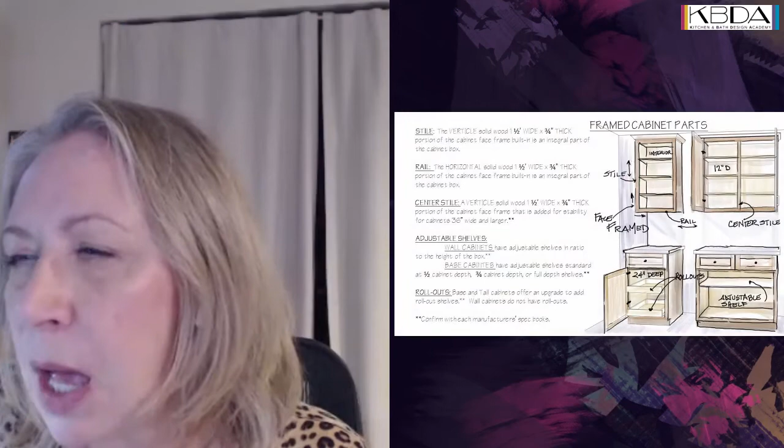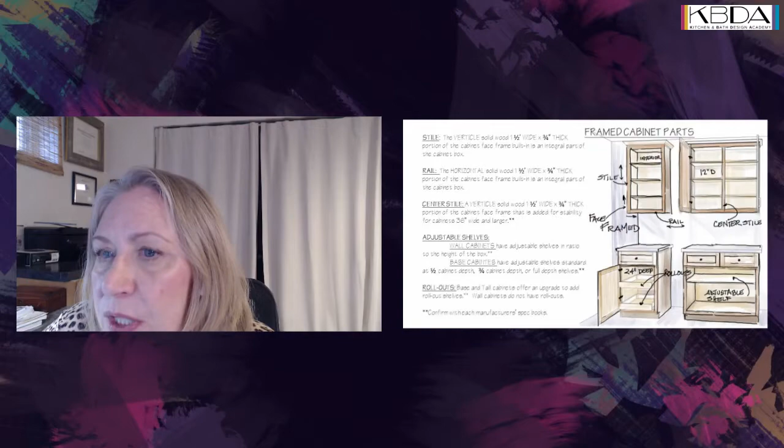Let's show this in the stream. I'm going to minimize me. Oh, I'm on the wrong side of town, okay let's do that again. Well this just doesn't, how do I do it? Take my head out. Okay, so what's on the top here is similar to what's shown in the rollouts on the bottom. So I'm going to make this bigger so you can see what I'm talking about.

So a framed cabinet actually has the solid wood frame around it. Like you open up the door and it's not 3/4 of an inch, it's 1.5 inches approximately. Generally everybody's a little bit different, but a face frame cabinet is usually 1.5 inch solid wood, stiles which go up and down, and rails which go side to side. And your interior construction, side construction, all that stuff is different. And then you have center stiles, whatever.

The main thing is, if you have an 18-inch cabinet, the opening in a framed cabinet is going to be less, because the 18 inches is an outside measurement, right? So we know that 18 is an outside measurement, it's an 18-inch cabinet.

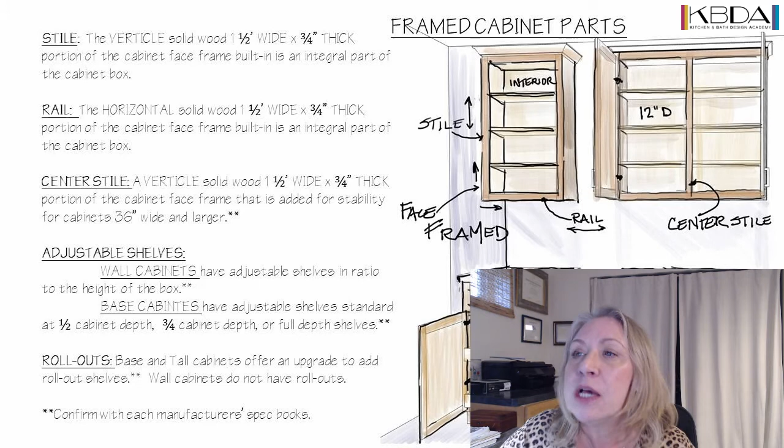The interior opening, meaning clear from this corner to this corner, is 18 minus - we're taking away 1.5 inch for my stile, minus my other stile which is 1.5 - equals my clear opening. On that 18-inch cabinet, it's 15 inches from opening to opening. You could say it's 18 inches minus 3 inches, because 1.5 and 1.5 equals 3. However you come up with it, you've got to minus everything, and that's your opening. So my 18-inch cabinet can only fit something in there, clear through the frame, with 15 inches. Okay, so that's the premise on framed cabinets.

Now, how do I get it to go in the stream too?

Now, with the frameless cabinet, here is the frameless cabinet. There is no frame around the face of the cabinet. It's strictly sides, top, and bottom, which is standard, typically 3/4 of an inch, medium density fiberboard, particle board, furniture board, whatever you want to call it. Usually in America, or whatever the millimeters are, it's 3/4 of an inch.

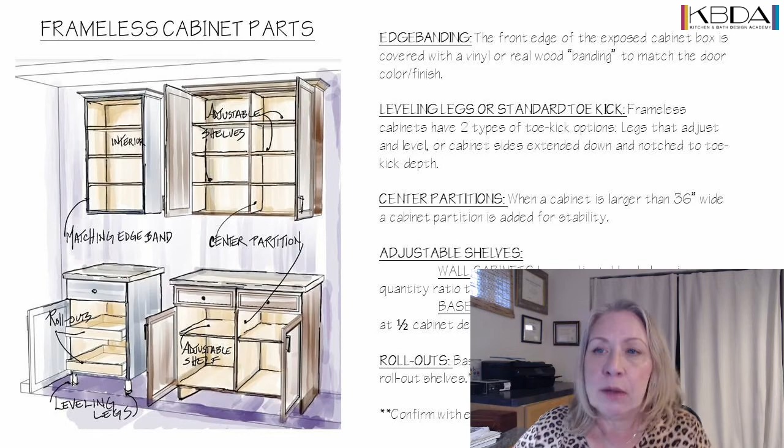So if I have an 18-inch cabinet, it's going to be a different mathematical opening. It's 18 inches minus one side 0.75, minus the other side 0.75, equals 16 and a half inches opening. So I have an inch and a half wider, right? 16 and a half minus 15, I have an inch and a half more opening. So take that into account.

So I'm going to hide that. This was the question. The question was, will my microwave fit in a 24-inch base cabinet? She already ordered the cabinet. It's on order. It's a 24-inch cabinet. So my question right away is, is it framed or is it frameless? Because that's going to determine the opening of the cabinet.

So she writes back and says it's a frameless cabinet. So in that, she shows the specs. Now I got to put my glasses on, and I don't know that anyone can see this. Should have cropped it all. Shoulda, coulda, woulda. Life goes on. You make it, you don't.

It's math anyway, I'm going to read it to you. So I'm looking at this Wolf microwave drawer, and it's a 24-inch drawer microwave oven. It shows me, on this face frame cabinet, the whole opening.

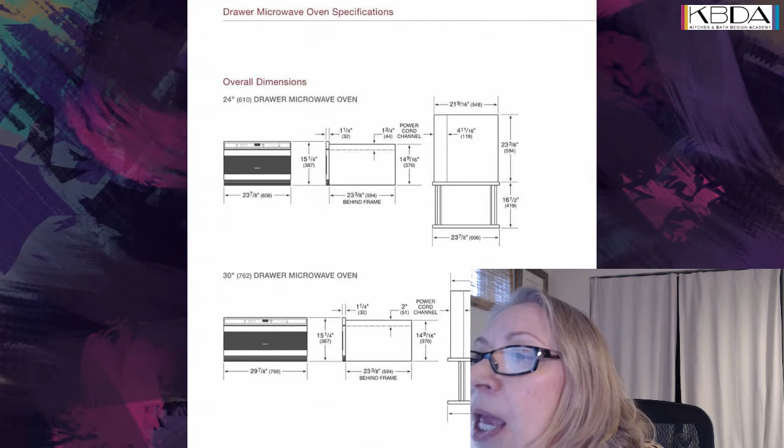This is really what you want to know, the width. So from door edge to door edge, the outside measurement is 23 7/8. Now, a cabinet that is 24 inches is 24 inches. So I have a 24-inch cabinet, and the overall appliance itself is going to have 1/8 inch clearance, which breaks down to a 16th and a 16th of an inch on each side.

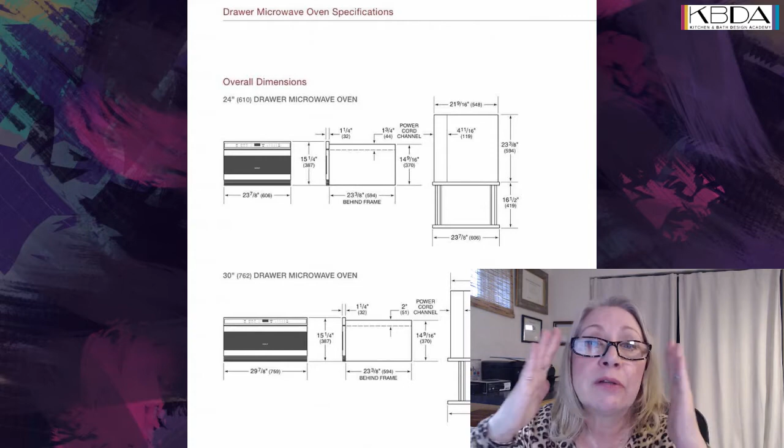So that's really going to be tight right to the edge of the appliance. It's going to go very close to the adjacent door. There's nothing wrong with that, just letting you know. Do the math. So we've got, but when I look back here, the opening in the back is only

21 and 9/16. So therefore, I have a frameless cabinet that's 24 inches. 24 inches minus my frameless, now, 0.75 minus 0.75 equals 22.5 inches. So my clear opening to get an appliance in from front to back is 22.5 inches.

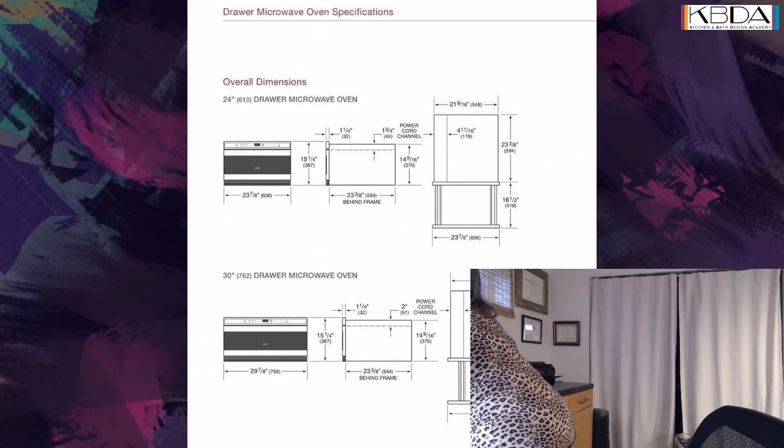And this appliance is 21 and 9/16, so I'm going to take 22.5, which is what's open, and minus 21.5625, equals 0.9375, which when I go to my handy chart... 0.9375 is, where is it... 0.9375, 30 thirty-seconds. Okay, so I've got 30 thirty-seconds left over. So I can get this microwave to fit inside a frameless cabinet.

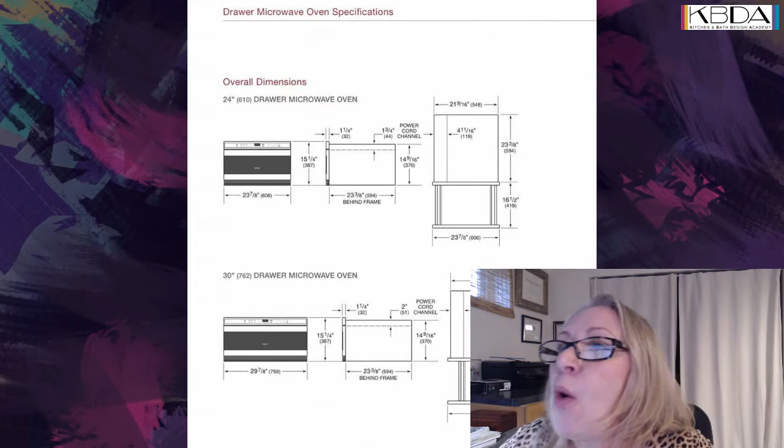However, when you look at the depth, and always a 24 inches deep cabinet, again remember that's outside to outside. So your 24-inch cabinet, depending on the construction of that, you have to allow for the back to be routed in, or dadoed in, or stapled on, or whatever, because the cabinet does not exceed 24 inches, and if it's millimeters, it doesn't go past. Everybody, that's a standard. The doors vary in thickness, but the box itself is 24 inches.

So I have 24 inches front to back, but I have a 3/4 inch back panel on my appliance. So I got to at least, on my cabinet, minus 24, I got to allow for that 3/4 inch. So I have clear, 24 minus 0.75 gives me 23.25 from front to back.

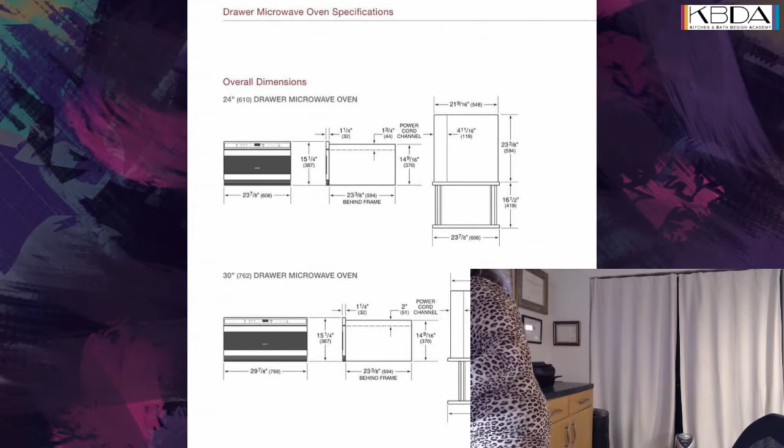So this is 24. I should just take this off the wall for a second. Feet up and down and up and down. See, I've used this for years and years because I don't always remember what they are. My trusty chart, sorry for my butt.

So see my chart? It's my calculating chart. You can download that for free. I love my little chart. Some people have it on their desk. Colin made it from the 2020 Power Users Group, made a nice little mouse pad with this.

So I have 23.25 left over. So I have 20 minus, did I do the minus? 21. No, oh shoot, clear.

24 minus 0.75 equals, just so I don't make a mistake, minus 23 point, and it's point, so 3/8 is .375.

I'm going to be short by 0.125, like a fraction of an inch, 1/8 of an inch. So more than likely, because it won't sit flush for that 1/8 of an inch, and you really want your appliance to get flush.

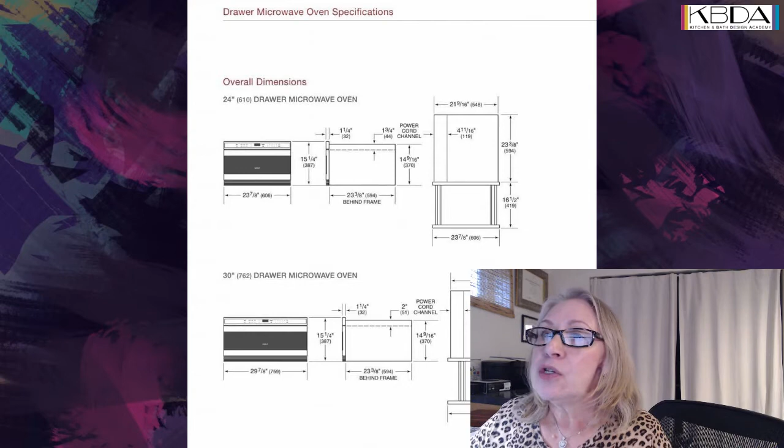However, the door is - look at me - the door is 1.25 inches thick. So the box is 24, and I'm going to have this front metal panel, adding up to 1.25, adding to it, it's going to leave me at a depth of 25 1/4 inches overall from front, with the cabinet plus the appliance door.

So the depth is 25 1/4. Typically, cabinets are 24 inches deep, and the door - now the box itself, so there's a box measurement and then there's a door on the cabinet measurement. Same way that there's a box measurement on this appliance and there's a door thickness on this. So a kitchen door is typically 3/4 of an inch thick.

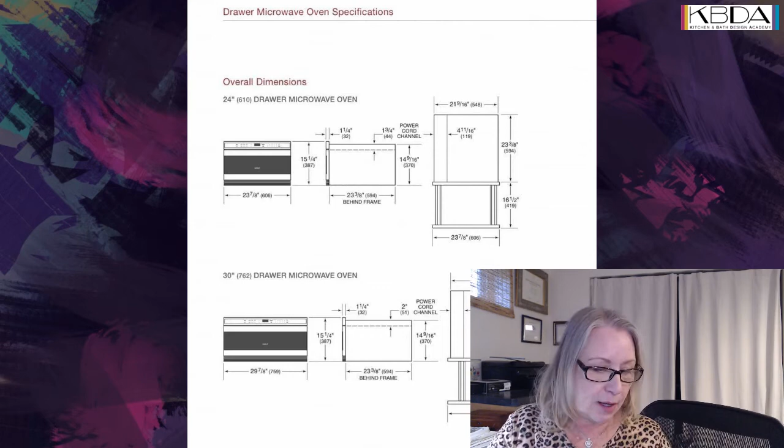So I'm going to have a 24 3/4 door. So 24 3/4, I've got 25 1/4 overall to the front of this cabinet, and my cabinet that adjoins right next to it is only 24.75 deep. It's going to stick out a little, like a 1/2 inch past a 3/4 door. If you get a 1-inch door, it'll stick out less, and a 5/4 door, it'll be flush.

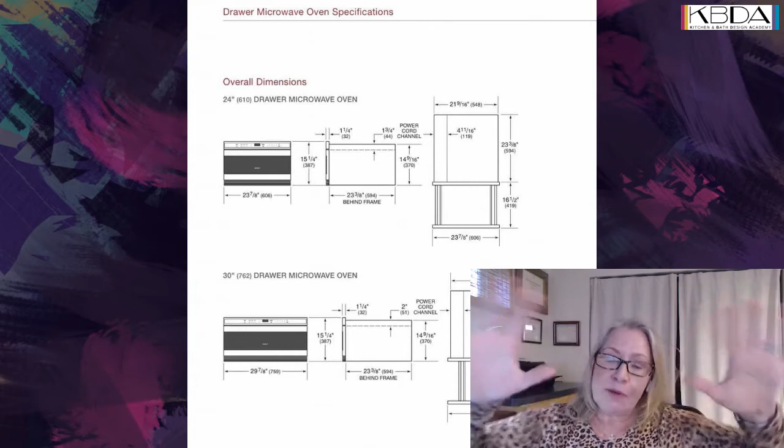So you got to know the thickness of your door, because some people want that really, really flush inset, and you have to kind of build your cabinetry around accordingly. So you have to see what is the look that you're going for. But you need to add all those things up so that when the appliance goes in, you don't go, oh, ugh. Because you might have a client that will freak the frig out because she's thinking it's going to be flush because nobody told her it wasn't going to be flush.

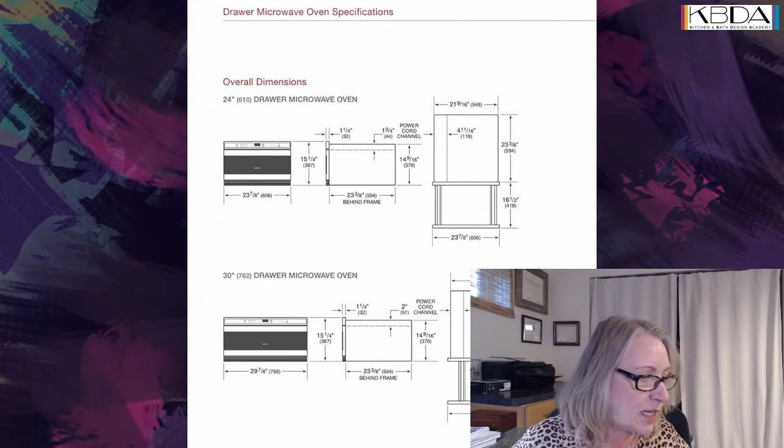You see? So when people are doing their kitchens, they're all freaking freaked out. I'd say, what do they need? They need a Xanax and a glass of wine, maybe the whole bottle. Hi, bye, hon, I'll see you later.

When you do a kitchen, it's really, really, really just very emotional. So you got to look at these specs. So this particular cabinet that's 24 inches wide, frameless, will accommodate this microwave drawer oven. However, they might need to cut a hole in the back of the cabinet to get it to stick more flush, get it in that 1/8 of an inch.

Or you tell the factory, don't put the back on. It's very common not to put the back in an appliance like this, to cut holes in the back of the cabinet. It's really not a big deal. It doesn't really affect the integrity of the cabinet, unless you're ripping the whole entire cabinet apart.

So anyway, then the door, you got to let them know the thickness of the door. So in her kitchen design with a 24-inch base, frameless, she can accommodate this microwave oven as long as she has now the proper height. So you do the same thing with the inside, the height of your opening.

So you're going to know that the door itself in this particular situation is 15 1/4 inches overall to the door. If you look really hard, you could see it. The door is flush on the bottom and protrudes up for a little bit. So it protrudes up.

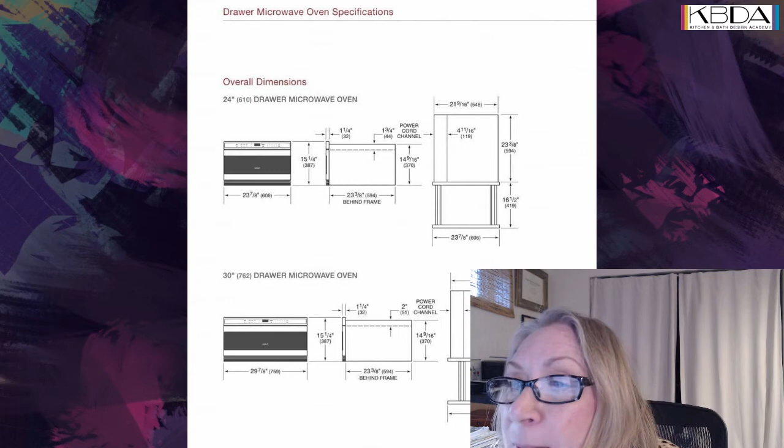Where am I? That is 11/16 of an inch, or 17.4625 millimeters. So that reveal at the top here is 11/16ths of an inch.

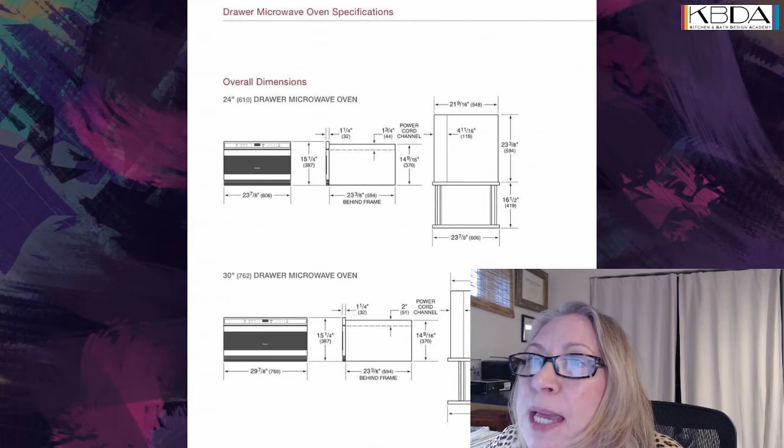So I got to make sure that I accommodate, and to me, I'm going to go up always a little bit, which is going to give me on my chart, one up is 3/4. You have to make sure that you've got 3/4 inch clear of space so that this cabinet door, whether you put it in the second, a little drawer above, or it's at the top, you got to make sure you accommodate this 3/4 of an inch at the top. And on a framed cabinet, a frameless cabinet, that's going to be right at the top.

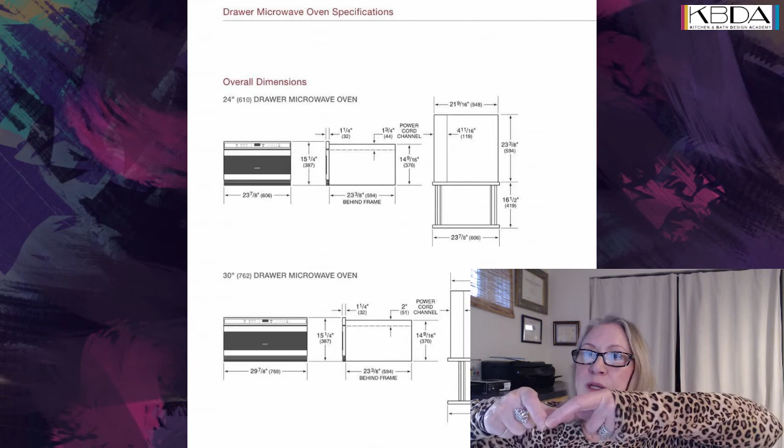Yeah, 3/4. That would come right to the very, because the 3/4 of an inch would be, there's a 3/4 inch strip at the top. So it's 3/4. So that appliance would fit very flush right with the underside of the cabinetry, the countertop rather. So that's how you figure out.

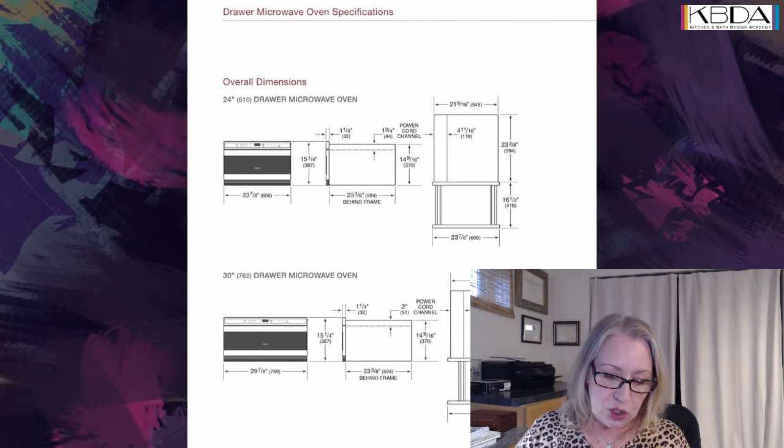So 24 inches, but if it was a framed cabinet, I would say this is my 24 inches minus 3 is 21 inches. And you know what they're going to have to do to fit this appliance in that base? The contractor's going to have to rip down the face frame, or you're going to have to make the manufacturer cut that face frame down for you and make that clear opening required for the 21.5625. So you can modify the cabinetry.

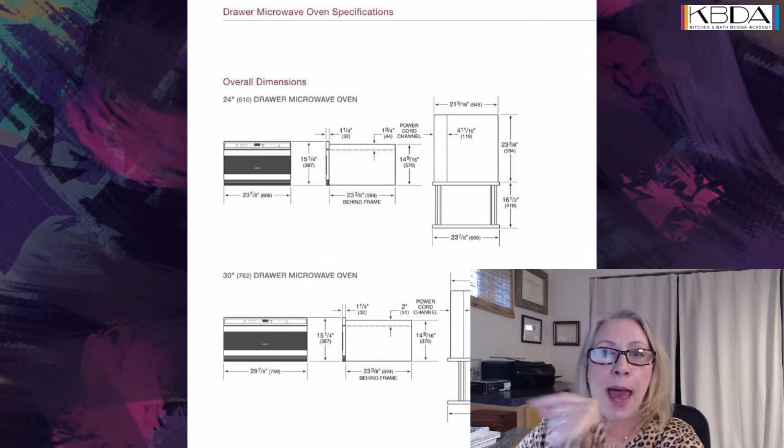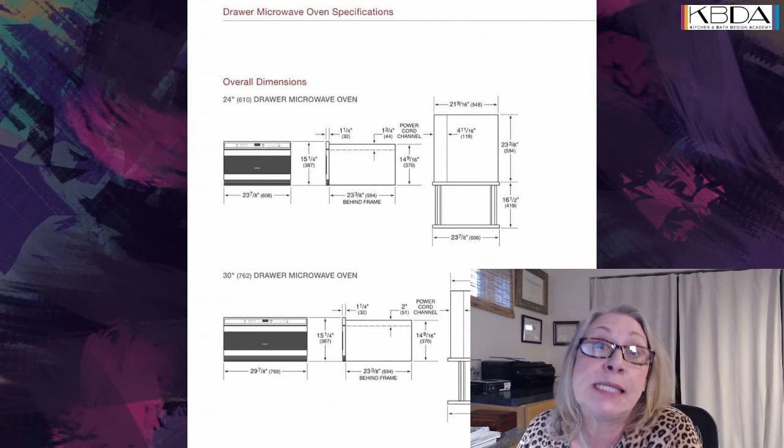So always going back to the specs. And this spec on this appliance is not the same as it's going to be on a GE. It might be similar, but you got to check it out. You got to research it. So you don't just arbitrarily.

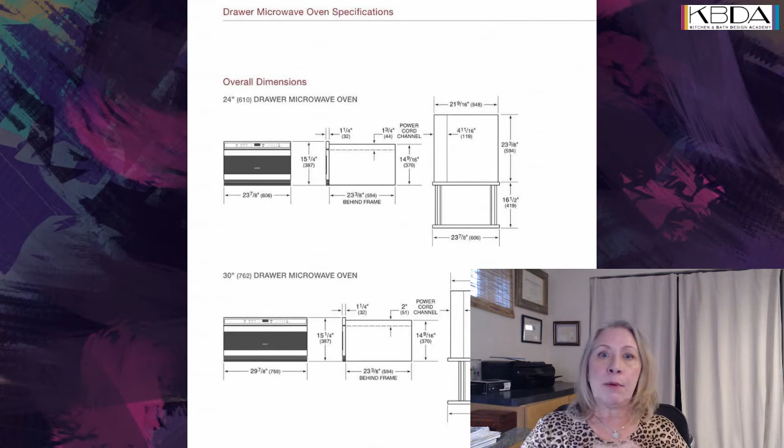And that's why with customers, what I do is I make my customers sign an appliance sheet saying, this is this appliance, here's the model number, here's the brand and model number, brand, model number, brand, model number. And everything is on a sheet, and you just get that customer to sign everything off. Because if the cabinet is ordered wrong, it's the wrong size. Cabinets you can't make it bigger. You can't do that. So unless you're cutting out a face frame or something like that.

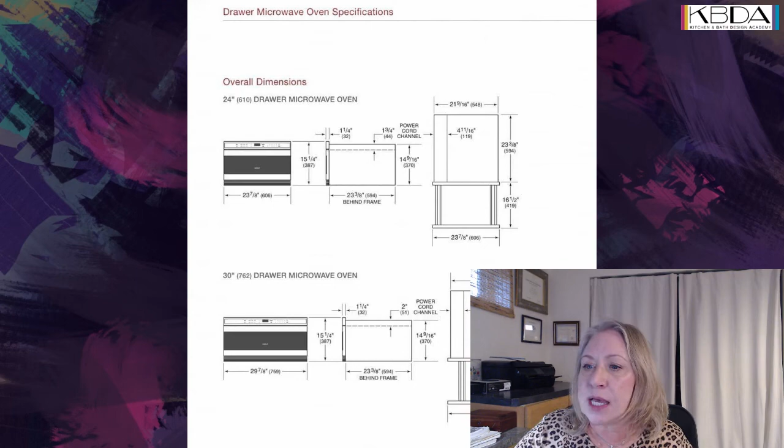So you really have to research and do your numbers on things like this. That is how you figure out how the appliance fits into the space. So it's always a matter of math, subtraction, division. You divide it, you subtract it, you multiply it. It's not calculus, it's not algebra unless it's an angle.

Let's see if we have anybody chiming in. I don't know, am I here? Am I here? Nobody commented there. I'm not there. Just checking my groups, people. Hang on. I want to make sure I hear things. I'm in this one. Anybody? Any questions? No, I have one person watching. So you'll see this on a rerun. A rerun, and

basically that's how you figure everything out. So get yourself, I like to use the calculator. Some people will do it on their phone, whatever makes you happy. It's a simple calculation, the most basic of calculating math, subtraction, whatever. So that's how you figure these things out. Very simple lesson. And that designer was lucky that her cabinet, frameless, 24 inches, will accommodate, no problem, that microwave, as long as she's accommodated the height.